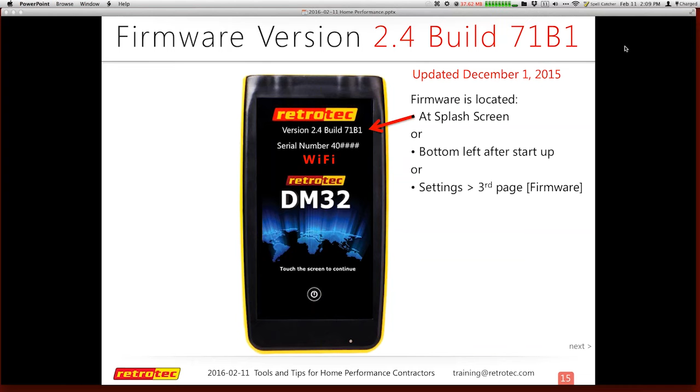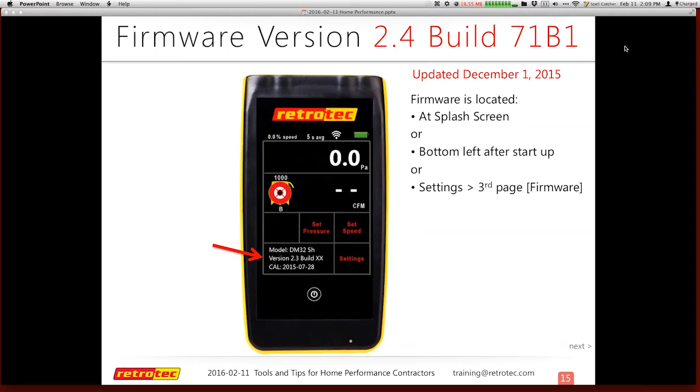I must remind people that if you have a DM32, the smart gauge, it does have firmware that needs to get updated regularly. If you call in for technical support, that's the first thing they ask is, what's your firmware? You can see that as soon as you open up your gauge on the front screen. You can also see it at the very bottom of the first home screen that shows up, but once you do a test, it doesn't stay there. So you can always go to settings and toggle your way through a couple of screens, and it shows up on the actual last page there on the screen. You can also get information about calibration and other stuff on that last screen.

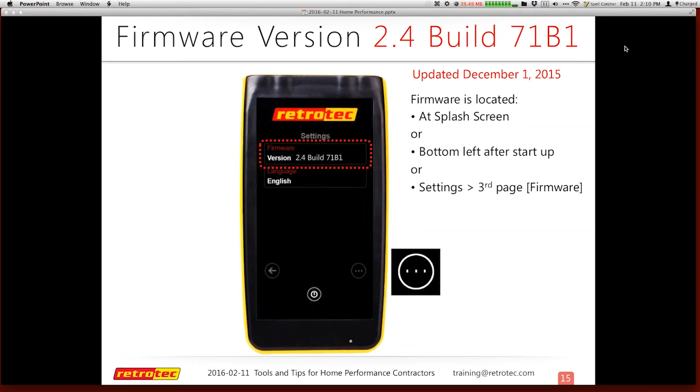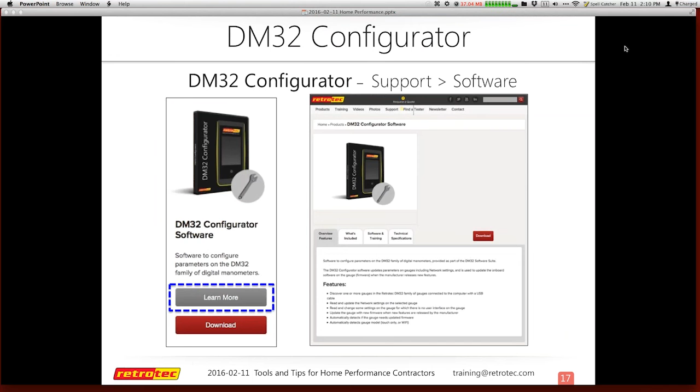So there it is, this is build 2.4, 71B1. If your gauge does not say that, you can download and open the configurator and update it with a USB cable. You can't use it with Ethernet, you must use a USB. The best thing to do is open up the configurator, have the gauge off, plug it in. It comes on, and it's usually found and tells you if you need to update it. You can download the configurator on Retrotec's site. I stress this because it's the most common thing that people aren't really always keeping up with, the gauge and all the settings that are on there. It's very straightforward, guides you through like any other kind of software you may do in terms of updating it.

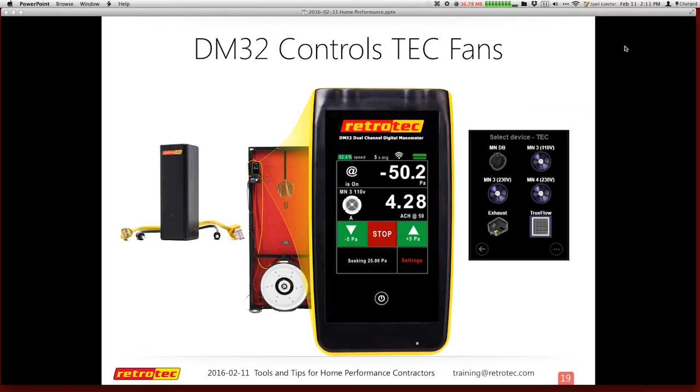We also get many questions during the webinar, so I try to keep these slides in, that the DM32 does control the TEC fans, and there is an adapter you can get to do that. It basically replaces the DG700, and you can control any of the devices that Energy Conservatory offers. There's an upgrade you can also get, you can trade in your DM2 or DG700 for a certain amount of money and upgrade to the DM32 Smart Gauge, a non-Wi-Fi model. A lot of people take advantage of that, and it's been a major success for a lot of people in the industry.

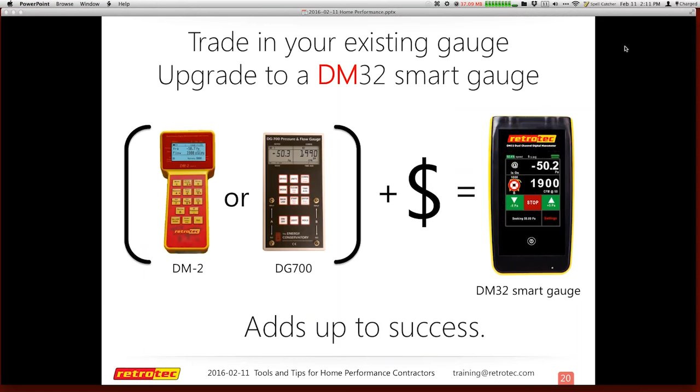This is some really exciting news we want to make sure we let people know about, RCloud is going to beta within a matter of maybe next week, if not probably for sure the week after. So what that means is all of you who go to retrotec.com, RCloud, can sign up for information. Many of you have done that, over almost 500 people have been wanting to know what's going on with the RCloud. Those of you who have signed up on that site will be able to become our first beta testers. You'll be receiving an email with a link to download this. It works only on a Windows tablet or Windows device, which means a PC. We will have Android and Apple coming right behind, but if you want to see what RCloud looks like, make sure you go to retrotec.com, RCloud, and sign up for the release notes, and you'll be included in our beta versions.

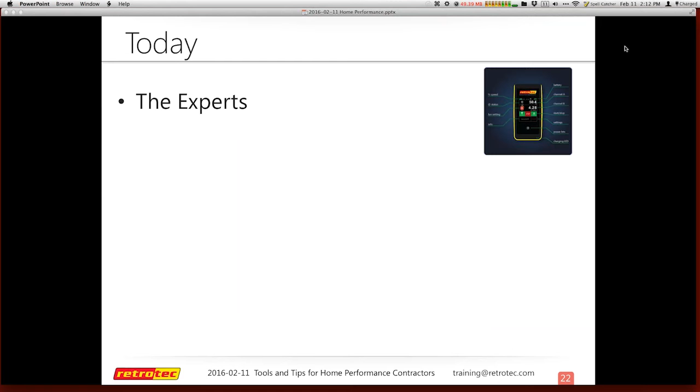All right, today we're going to hear from our experts on many of these topics that we've got. They include home performance versus audits, lessons of success, different types of equipment. We're going to talk about how to communicate with homeowners. That's one of the greatest challenges with our industry - many times you're trying to explain what you think is a problem, what they think may be a challenge, and some of the pressure imbalances or safety things that should always be included in our assessments.

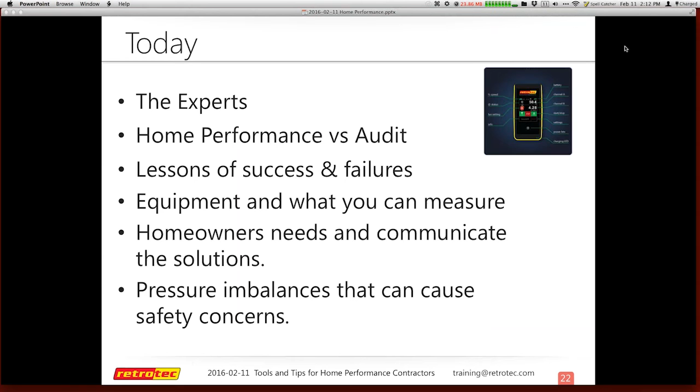Today in the background, I have Jeremy Begley, who is the owner of HVAC to Home Performance. Jeremy is a good friend - I've presented with him in several locations around the country, and we'll be doing so at the Midwest Energy Conference coming up in a couple of months. The other one is a legend in our industry. If you do not know these guys, I highly encourage you to go out of your way to find them at conferences or see them places where they're speaking, or get in contact with them, because one of the things they do is really reach out and want to help others be successful in home performance.

I do want to give some details about who these guys are so you understand their background. Jeremy was a founder of Home Performance and energy efficiency evaluations in Cincinnati and the greater Cincinnati area. He's now broadened his scope, realizing he does better consulting other HVAC companies considering this work. He left his regular day job and launched his own consulting practice just back in November, so he's a perfect person to get information from about becoming a home performance contractor, whatever your background - auditor or HVAC contractor. Both these guys are very involved in ACCA, HERS raters, and home performance professionals, so many of them share a similar background with a lot of the folks here.

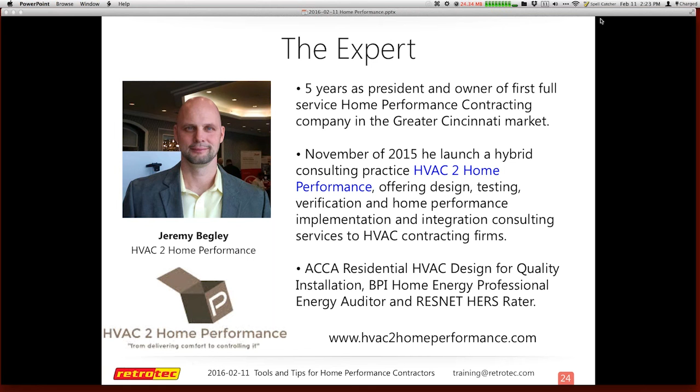I'll leave you on the phone there, Jeremy, real quick. Can you kind of explain to a lot of folks, like I actually was an energy auditor, I guess still am, once you're an energy auditor, always an energy auditor, versus what is a home performance? Is there something that people are doing differently while they're in the house? Is there a different assessment? But I just want to know, can you kind of separate home performance versus energy audit?

Typically, energy audit, in my mind, is a term that is used just for the process of the in-home evaluation of the home itself, understanding what's going on, what needs to be fixed and in what order, and maybe what the paybacks for those different measures may be. Whereas home performance from a contracting side is actually being able to go back, after the energy auditor, who may be working for you or a different party, has given the homeowners a comprehensive list of solutions and got them to understand how they could benefit from that, your company as a home performance contractor would be able to go back and fix any of those things that the energy auditor came up with. So even though, I think energy auditing is really a piece of home performance.

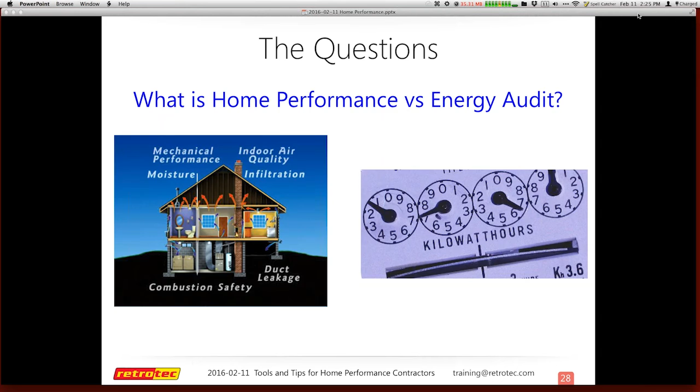All right, great. Rob, I'm going to hit this with you. Can you describe, you have a bunch of guys that are doing this regularly. How many do you have on staff that are actually going to homes and doing assessments? I have 11. That's, I can't fathom trying to organize that or keep track of that, but you're doing very well at it. Can you describe what is their typical evaluation? Let's say they're coming out for a comfort issue in one of the rooms, what are you guys testing, or what are some of the things you guys always do when you're at a house? Can you describe that process?

Sure, it varies. I mean, that's such a broad question because, being in the HVAC industry, most of the calls that we're getting is there's an HVAC problem. Like you said, the room's cold, so my furnace is not working well, and you need to come out here and fix it because this room is cold or this room is hot and so forth. So we end up sending a service technician out there. All of our technicians are certified and do audits.

Any service technician going out on a service call is aware of the home performance side of it and knows what to look for. So when he goes out on that call, he's going to listen to the customer's needs, wants, issues and concerns, and then do like a 15-20 minute walk around.

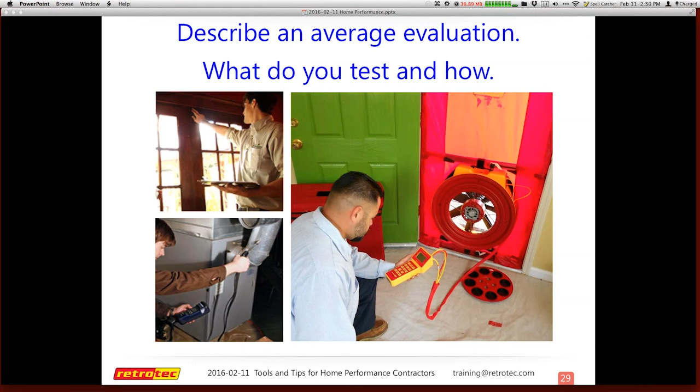That's pretty impressive. One of your sales techniques is one of the things that I preach regularly, and that is to guide your client to let them discover the solution to their problem versus trying to tell them, because nobody wants to be really told what their bottom line is. So that's great, right?

I got one that I'll let either one of you comment on. Let me explain what this is - many of you may know Corbett Lunsford, and his wife Grace has kind of joined their team. Corbett's a good friend, and one of the things he did was stop playing with the industry and went right after homeowners, which a lot of people weren't really ready to do. But he was like, you know what, it's all about the homeowner. He's really taken his entire effort to just working with homeowners, and he's had a really good success.

He's been trying to get a television show for many years, and he shared with me the feedback he got from many of these producers. He says, Corbett, you'll kill all of our other shows. And what they meant by that was there's all of these fix it up, do it right, tear it down, redo it shows that totally ignore home performance. They do not evaluate air sealing, they do not evaluate insulation - they just make it pretty.

And they're like, Corbett, if we promote your show, all of our other shows will be devastated because they'll now have to reevaluate the home on how well it performs for energy efficiency. So none of them will touch him in terms of promoting his show, which is really frustrating because he does everything in this cool and sexy manner and really wants to do it. So he got frustrated, but he hasn't given up, he just keeps going at it.

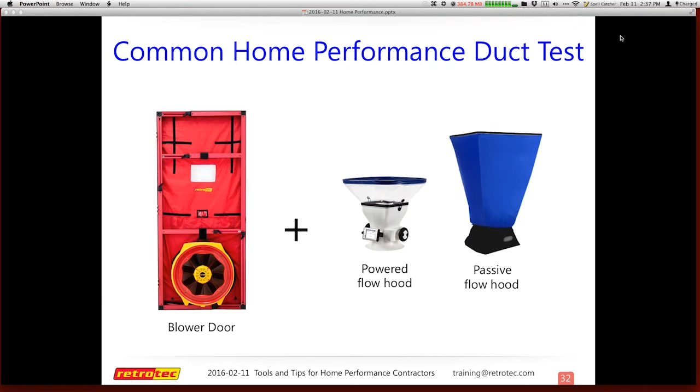So the concept is that I'm going to set my blower door at the front. And I'm one who actually promotes, if you're going to depressurize the blower door as you normally would, that it would be best if you had a powered flow hood, based upon how they do a much better job of handling air that comes at them. That's always one of the challenges, is there any kind of turbulence, or are they actually handling the air that comes through?

But you could use passive flow hoods. Many people do. The other one that's more common that I've seen out there is when they actually pressurize the house, and the flow that moves through the hood is measured as their leakage.

And you can go around, again, all the ducts are open, and I can go around and actually measure the differences between opening one register or even a return. This actually is really determining your leakage to outside.

So I can go around, and if I have smoke or people can feel air moving through their grills, they have leakage. And I just want to know, is this something you guys did do, still do, or is this one of your ways of actually evaluating duct leakage, Rob?

Yes, that's exactly what we do. You pressurize the house, yeah. Yeah, I'm not a fan of the duct blaster.

Okay, yeah. And I know why, because you told me about your training. The National Comfort Institute has a whole different philosophy about how to measure ducts. So I know that background and know Rob and those guys well.

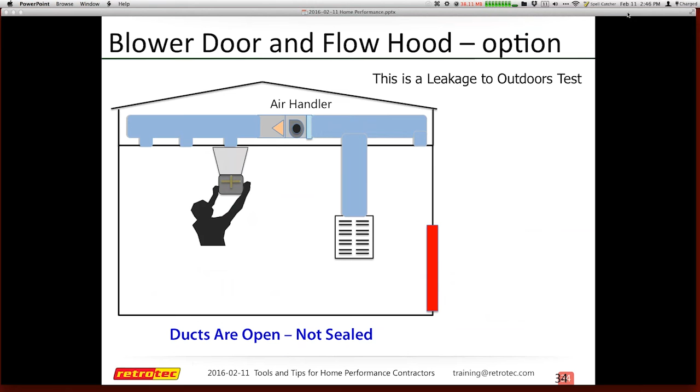But for those of you really trying to do lower flows, this is the device to use. If you are going to use a passive flow hood, I have learned from many professionals: do not buy a cheap one, because you'll only be frustrated, especially at low flows that don't really register, or it's inconsistent, or it doesn't understand how to handle higher flows in terms of the extra back pressure that shows up. So if you want to get one, you're going to spend almost the same price as the flow finder, so make sure you're getting something that works well in the field.

All right, I'm going to skip back through.

A quick comment on the LBL study of passive flow hoods. They showed that in a lot of circumstances, particularly when measuring returns in the same duct, the errors can easily be 40%. Whereas with this one, even in very touchy situations, the errors are still going to be within the 3% range. So it gives you a diagnostic tool that is unbelievable.

The very first house that I used this on, I was able to detect an enormous imbalance between the crawl space and the main body of the house. I said, look, you've got to open the door between the crawl space and your house until you get this fixed. Just opening that door and relieving that pressure imbalance was able to save them 25% a month on their energy bills.

Because the imbalance in the house was so bad, I think they had 250 CFM of return on the main floor and 700 CFM of supply. So essentially all the return was being sucked out of the crawl space.

So I think that's an example of the kind of diagnostics you can do with a tool like this. It'll enable you to see things you'll never see in any other way.

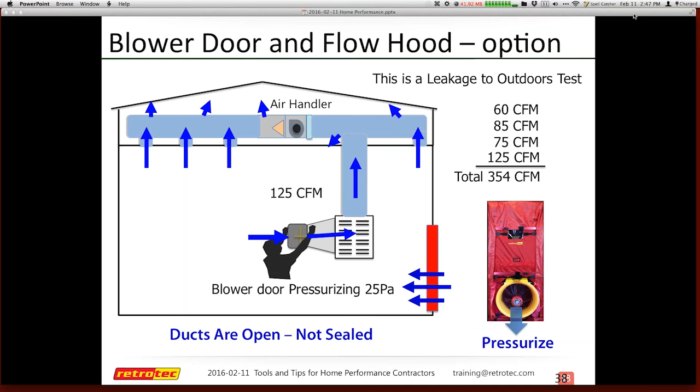Back to you, Joe. Thank you. Okay, let's get back to some questions here. I'll start with Jeremy.

I'll give you the blower door and pressure pan as one unit. So if you had just one tool, if you could only go to your truck and get one thing out, which of these would you feel would be the best thing to use to do an evaluation of a home, Jeremy?

Well, 5 seconds ago I would have said the blower door and the pressure pan, but after hearing Colin describe the powered flow hood and the different things it could do, I'd have to say that's pretty much a tie. Sounds like you could do a pretty good duct evaluation with that powered flow hood without the blower door, but that still leaves the house to be answered for.

So if that's coming as a kit, I'm going to have to say the blower door and the pressure pan. Rob, how about your choice?

Just so I understand the question correctly, is this just for home performance testing, or is this home performance and HVAC testing? I'll let you answer that. How about that? So why don't you give me both?

If I'm going to do home performance, I would use this. And I know where you're probably going to go with the HVAC. So go ahead and give me both.

Well, yeah, home performance, exactly what Jeremy said: blower door, pressure pan. And of course HVAC is one of the flow hoods. I'm dying to get a powered flow hood. I just had my savings bank filling up some, so hopefully soon.

Well, I can tell you that the price was reduced $1,000 from what it was a year ago. So the powered flow hood is now actually cheaper than the one really good passive flow hood that's out there—almost $800 or $900 less than the really good passive flow hood you normally should buy.

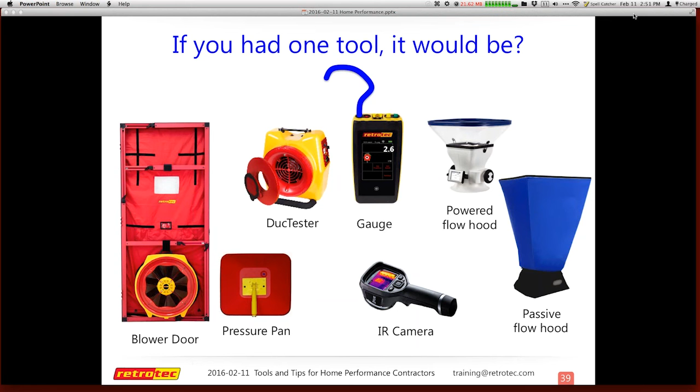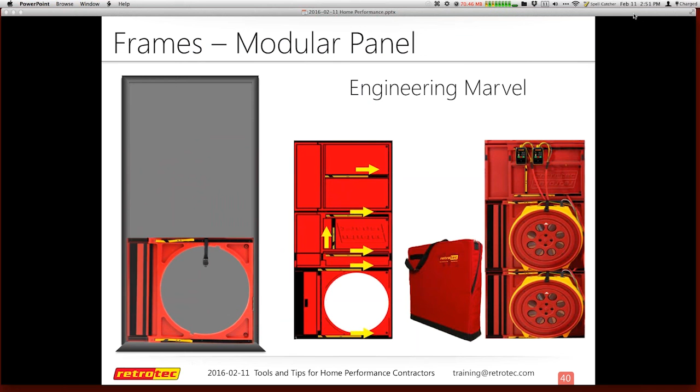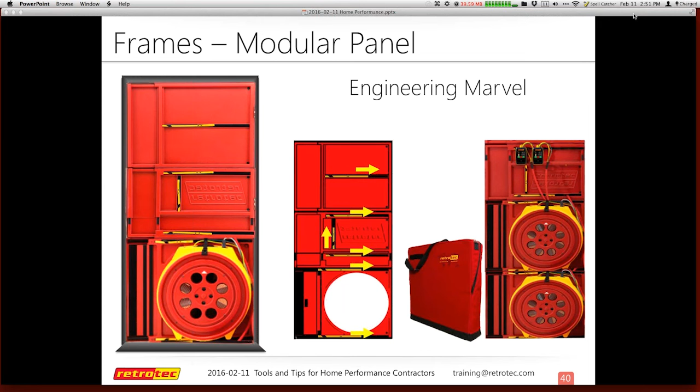I do want to make a promo here because this was a modification that happened recently at Retrotec, and this was almost an exclusive for Comfort Institute—not many people were aware of the hard panel that's out there. This is an engineering marvel, and it was just recently modified so it'll work with any of the blower door fans that Retrotec sells. Prior to that, you had to have one of the older style fans that was much heavier with a much larger connection that kind of slid into place. Now they've re-engineered this so it'll work with the older fans or the newer fans. So you can use it with the 1000 or the new 5000 fan. The picture on the right actually comes from DOE.

These are one of the things people found was a quick way to set up, and it was really impressive for clients to see—zip, zip, zip, okay, I got my blower door—and it really is a professional setup. If you're interested, somebody at Retrotec can give you more information, but many people didn't realize Retrotec had this hard panel and how amazing it is to set up to do these performances.

Hey Joe, one of the reasons home performance contractors liked these was that it's set up fast, but more importantly, when I talked to them about using a cloth door and how people reacted to it, they said people just got bored and walked away. Whereas when the contractor or evaluator was setting up the hard panels, everybody would gather around because it was such a fascinating process—it just seemed to go up almost by magic, and sometimes the whole family would be sitting there watching them set it up. So there is a difference in terms of the appearance for sure, and the performance is pretty much the same, but it's really about looking professional, which is what this is all about.

And somehow the cloth door panel, which was never sold through the Comfort Institute hardly at all—I think only about 2% of them ever bought them—just doesn't have that kind of excitement about it.

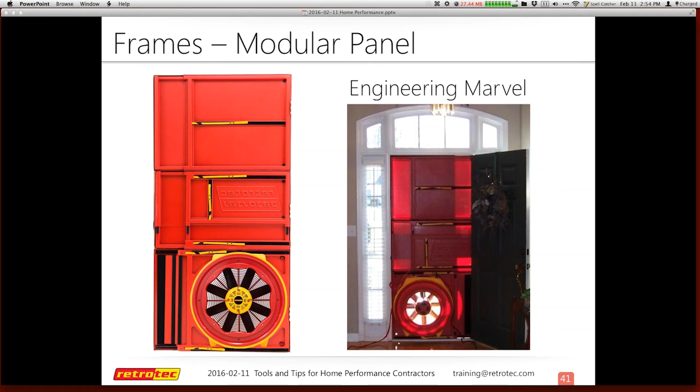Thank you. All right, so let's keep moving.

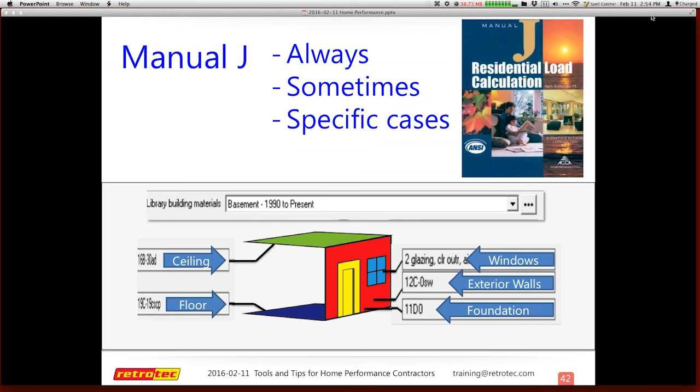Okay, so here's one. I know Jeremy's take on this, and I'll explain why. Jeremy and I do a presentation that talks about the Manual J and why it should be including the blower door. So I talked to many HVAC contractors, and I asked, how many of you do a Manual J? Well, sometimes, depends. Not always for replacements. I ask, do you guys have a blower door? They say, oh yeah, we have a blower door. Do you use a blower door to do your Manual J? Oh, no.

One of the things that happened a little over a year ago is that infiltration, which can sometimes be 30 to 40% of the requirement for the HVAC system, especially in northern climates, is based upon infiltration, which really should be based on the actual infiltration from the blower door. So Jeremy and I have a presentation where we've done case studies based on Jeremy's work in Cincinnati to show the impact of just using presets in Manual J versus actually doing a real blower door and showing the real infiltration. Sometimes it's twice as much as what the software will estimate.

So we highly encourage you guys to use your blower door and input that data into your Manual J, depending on what type of software. They both allow you to do that. So...

That kind of gives a quick overview. Jeremy, do you want to explain how you use the Manual J? Because I think if you do a good Manual J, it's just like doing a RESNET calculation, because you account for so much in terms of the windows, the doors, the ceiling. So can you comment on why the Manual J is such an amazing energy audit software?

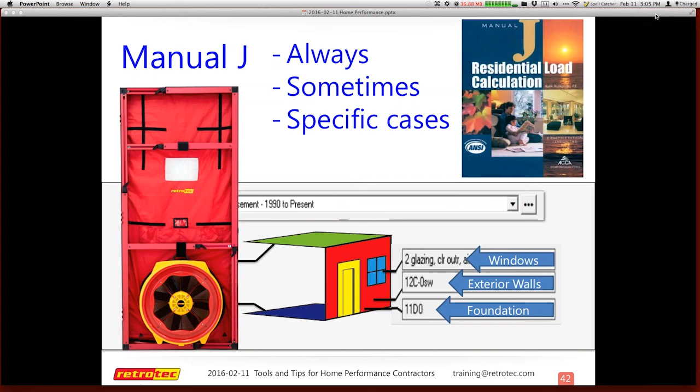That's the same stuff HVAC and home performance has been doing for years. So there's no need to put that home performance spin on it in your marketing or when talking to homeowners, because you'll just confuse them. We just want to hear from them what's causing their grief, feel their pain so to speak, and then try to fix that instead of fixating on home performance all the time. Great point, Jeremy, well done.

Okay, this is a loaded question, and I'm going to have Jeremy answer first because I know the answer probably from Rob for the most part. Can you do home performance without being the HVAC contractor, Jeremy? Do you think this is possible, or do you have to have somebody that's your buddy? The answer is, yeah, you can be a home performance contractor without being an HVAC contractor, but you can't do home performance without including HVAC in it.

So there's a lot of obstacles to overcome for the rest of home performance without actually being an HVAC contractor and doing it well. A lot of that is experience, a lot of that is licensing. There's all kinds of different things that go into it that you don't have in a lot of the other fields in home performance. So it's okay to not do that in-house and have a relationship with an HVAC contractor who can service you, understand what you're trying to accomplish, and do the work the way you prescribe it.

But you definitely cannot be an HVAC or home performance contractor without understanding and looking at the HVAC system. At that point you're just an insulator, or just a guy with an infrared camera, because you're not looking at the whole house - the HVAC system is such a huge part of it. So yeah, like you said, it's a loaded question. Can you do it without being an HVAC contractor? Sure. Can you do it without knowing and understanding the HVAC system and the ductwork? Absolutely not. That's the difference in my mind.

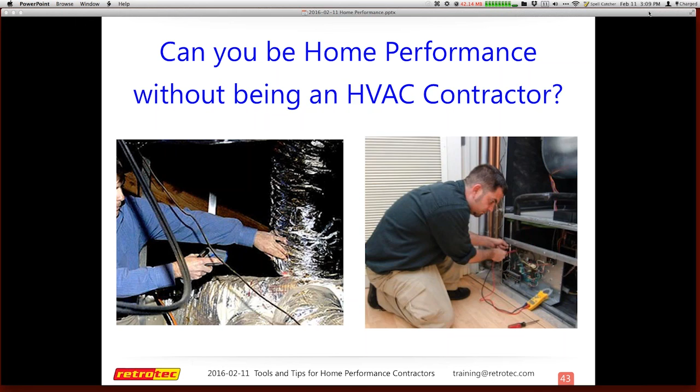Instead of the do's, can you guys share one don't? Like, we learned when we go into houses, this is something that we don't do. Rob, you want to go first?

I know back in the day we talked about manual J's, and I remember going out as a kid, and I would ask the sales guy, okay, how are you sizing this house to make sure it's the right unit? And he'd stand on the curb and hold up his fingers, and however many fingers it took to cover the house is what size unit it needed. Don't do that. Okay.

They used to have little cutouts of the house that you could hold at arm's length. That's right. Yeah, right. Okay.

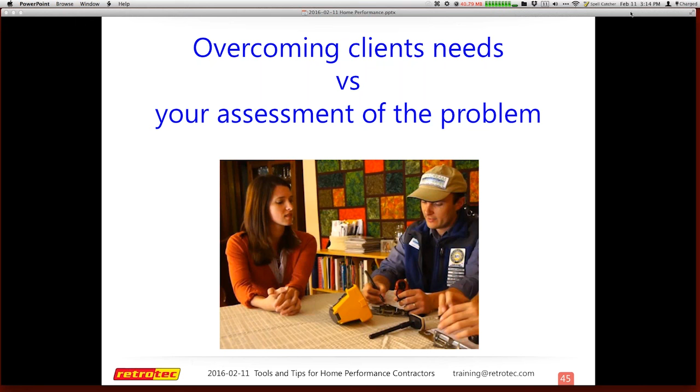So, Jeremy, I'm going to give you this one, which is one of the most common challenges no matter what you do, whether you're selling windows, doors, cars, or whatever. So how do you overcome the price? I know one of the things people are doing now is kind of staged installations, so you're not hitting them with an $18,000 bill. You say, let's talk about this as a great first step, maybe later in the year we can do this. But a lot of them are like, wow, that's more money than I expected. I was hoping for a $400 bill, and you've got me down for $3,000 of home improvement.

Well, one thing that I am, and from talking to Rob on other occasions he is too, is actually trying to pre-qualify people's budget. You can't be scared to talk about it. Money's going to be spent to fix this stuff. We know that, they know that, you wouldn't be there otherwise. So one of the things that I really advocate is understanding the budget up front.

And that's a simple conversation that you can have with somebody at various stages in your sales process, which is, well, so what is the budget that you have for this project? What budget do you have in mind? Or, is there any constraints that we should be worried about as I formulate the solution for your problem?

That way we know up front what the homeowner is wanting to spend, and it gets that elephant out of the room, because these upgrades can add up quickly. If you're never talking about the price from the time you walk in the door, and then you slap some big ticket item on somebody, they're going to have sticker shock, and you might walk out of there and never get a call from those people again.

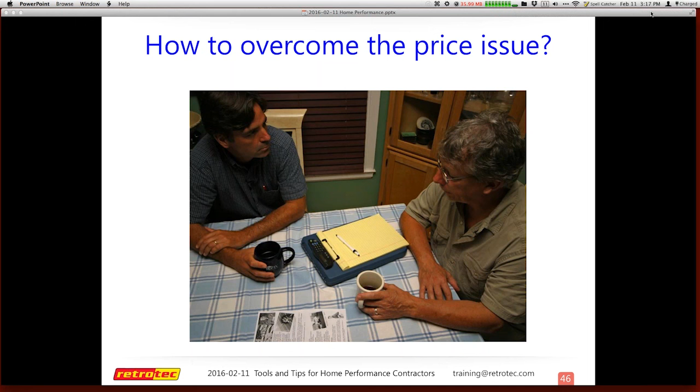I think this is one of my last questions, because IAQ and healthy homes are one of the next things that's phasing green out. Green is kind of everywhere, but healthy living, healthy homes is beginning to overcome the market in terms of things you see on the shelf, things you see in your house. Products you're buying are no longer green; they're now called healthy living, healthy products. So is this something you guys are beginning to include in your conversations or your business model, Rob?

Well, apparently you didn't look at my logo long enough. I guess not. Oh yeah, it's on the bottom. That's right, it is. Sorry. Well, not to be blunt, but some people say they do that stuff.

Right. Yes, it's definitely something that we are. 2016, matter of fact, is our complete focus. I have a really large presentation to do on that, where I divide it all up, depending on where I need to go and talk about it, because I'm setting up to talk with a lot of homeowner associations, real estate companies, and so forth, and a lot of support.

And it's ironic, Larry Zarker and I have been talking about this for several years, and then the article he had out last July 2015 in Remodeling magazine on healthy homes, about the study that New Zealand did. Are you familiar with that? Yeah, I did read over that, and Colin's actually from New Zealand.